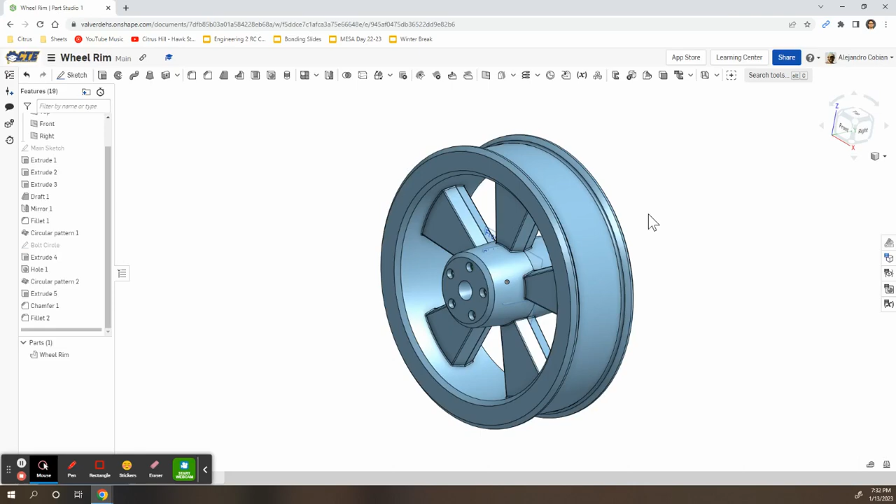Hey, welcome back. So for this video, we're going to work on this rim right here. Notice this is what it looks like three-dimensionally. And this is what the exercise looks like. It's called exercise wheel rim. Here are the instructions. So let's go ahead and get started.

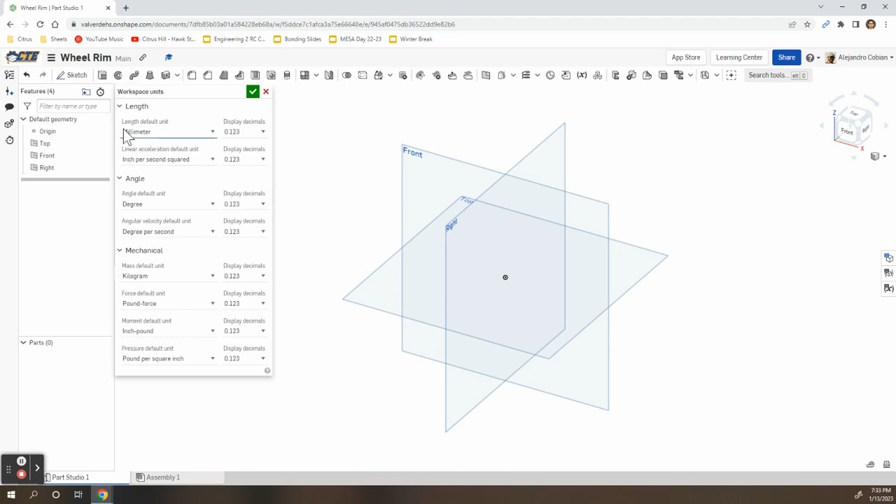So for step one, we want to change our units to millimeters and we want to create a sketch on the front plane. So go ahead and click on workspace units. Make sure we're in millimeters. Select sketch and we're working on our front plane.

For step two, we're creating 1, 2, 3, 4 circles and 2 lines with 1 construction line. So let's start off with our circles. We're centering them right at the origin, and we're just gradually making larger circles. So for our line, let's go ahead and hit L and Q. Click on our origin, and we are connecting this line all the way to the outermost ring.

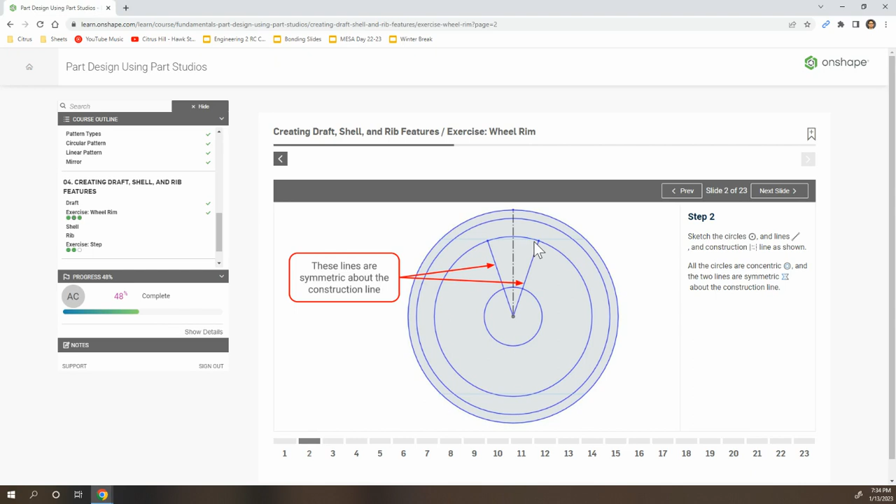And notice the relationships. All of these lines are coincidental to the origin, and then our line is coincidental to the outer ring and the origin. And it's also vertical. And we're going to create 2 lines that are connecting to the origin and to our second ring. So here we go. Let's create another one.

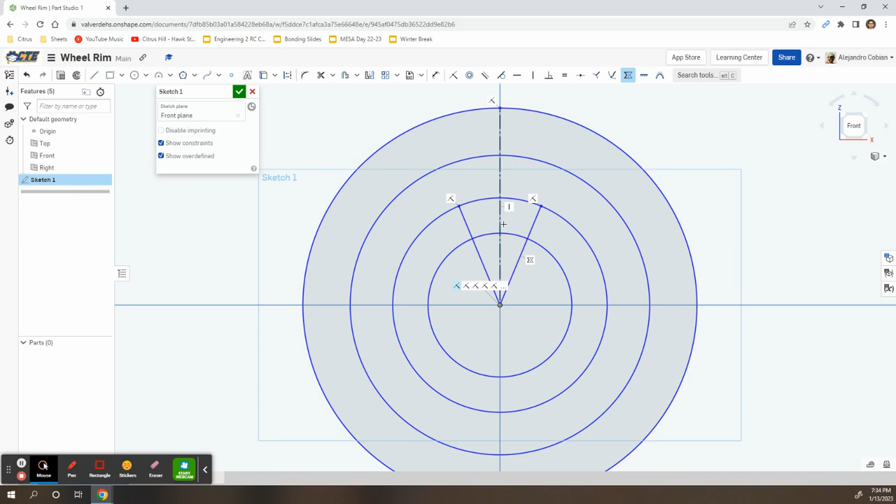And the distance doesn't matter because we're going to add a symmetric relationship. So let's go ahead and click on these 2 lines. And let's make them symmetrical about this construction line. And notice how it automatically moves. So we're good to go.

For step 3, we're adding 5 dimensions. Notice the diameters for our rings and then an angle for our 2 lines. Let's go ahead and select D or select dimension. So let's click on our 2 lines. We'll start here. Zoom in. We want an angle of 30 degrees.

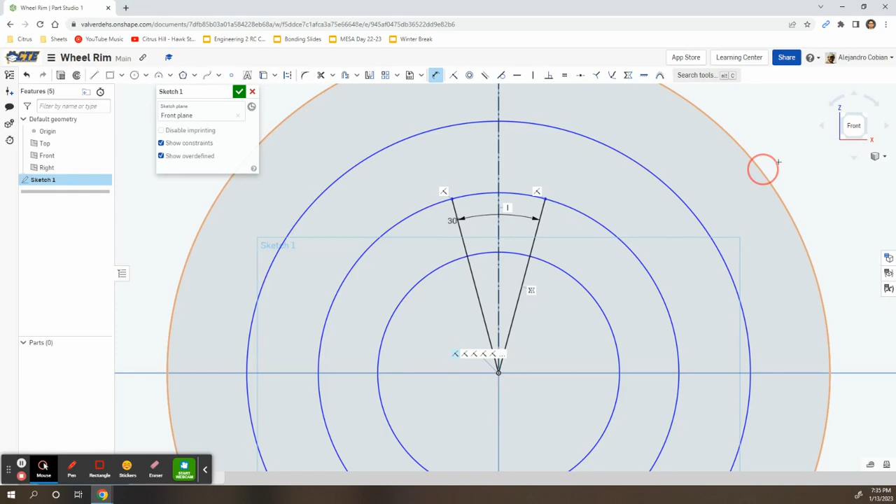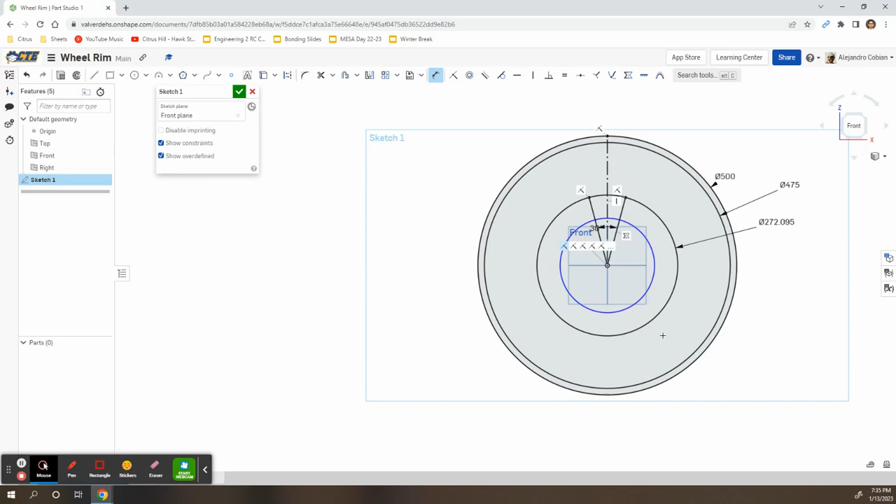Let's start off with our outer ring, which will be our largest ring. And this will have a value of 500. Our second outer ring will have a value of 475. Our third outer ring will have a value of 400. And our inner ring will have a value of 175, 150.

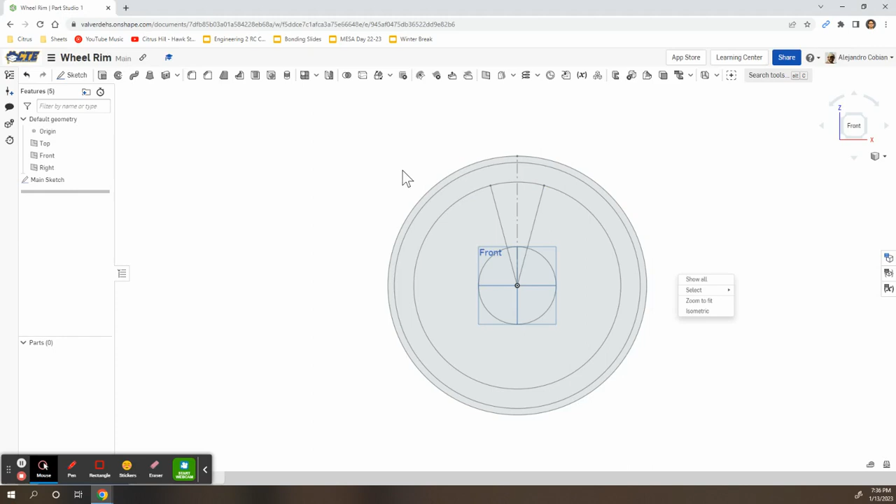For step 4, we're changing the name of our sketch to main sketch. So click here, write out main sketch. For step 5, we're extruding the 2 outer rings. So go ahead and click on extrude. Let's select this ring and then this portion here.

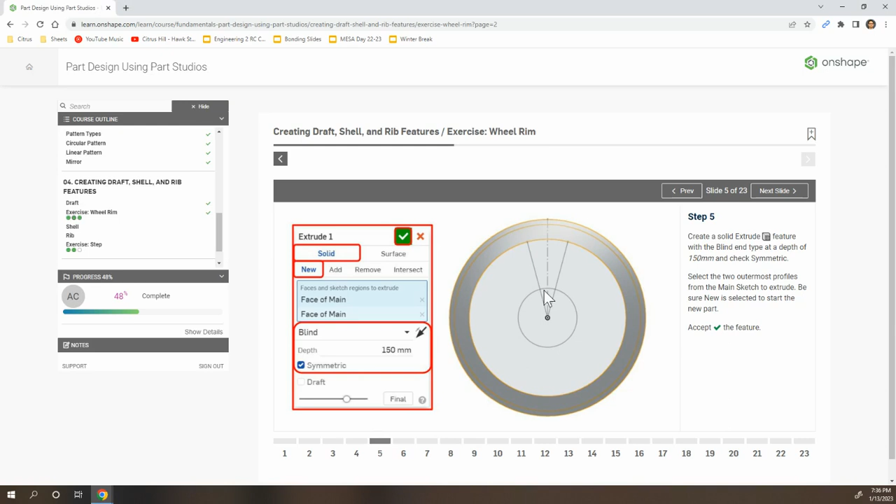We're going to select solid new. We want blind and a value of 150. Let's angle this. Notice we want to click symmetric as well. And we hit the check mark. For step 6, we're renaming part 1 to read wheel rim.

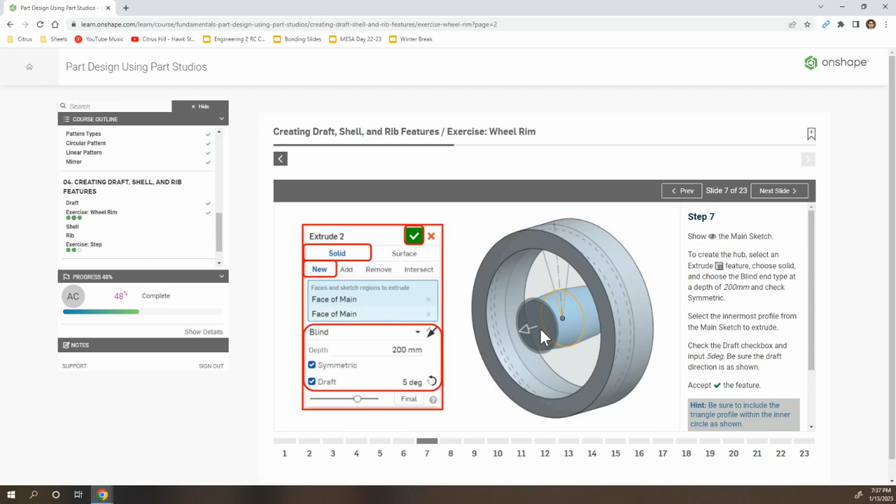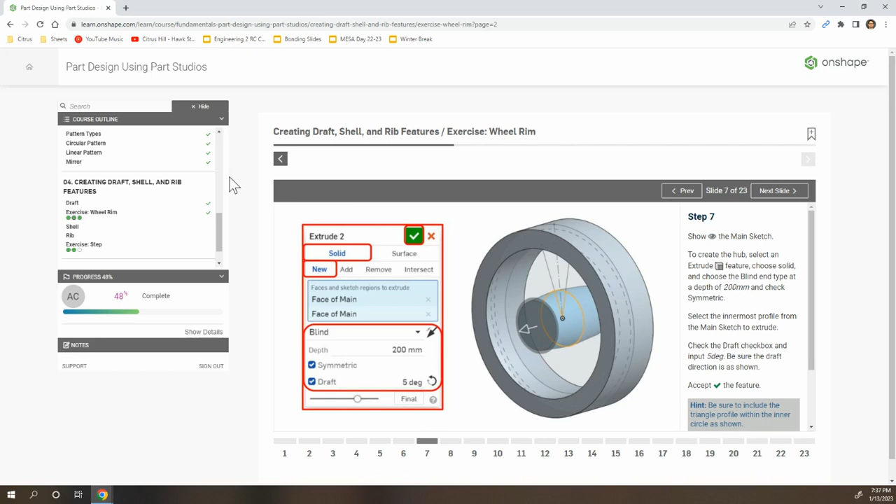Now we're going to extrude our inner portion of our tire. So let's go ahead and look at the main sketch. We're going to extrude again. Make sure you select this little triangle and this portion here. We want solid new, blind, go on a depth of 200 millimeters. We also want the symmetric.

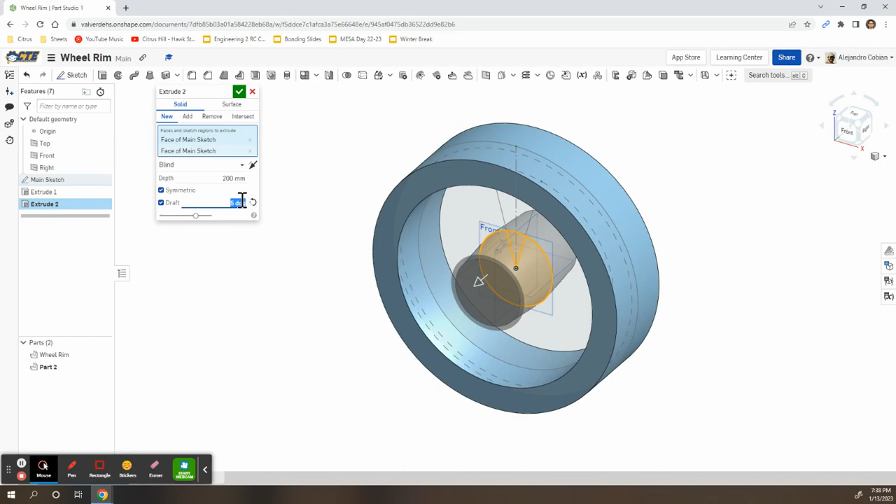And then we're going to draft this. So notice we're having a smaller diameter in the inside and we gradually go outwards with a larger diameter. Let's go ahead and flip that, so we can reduce the diameter as we go outwards. And we want this to have a value of 5 degrees. And hit the check mark.

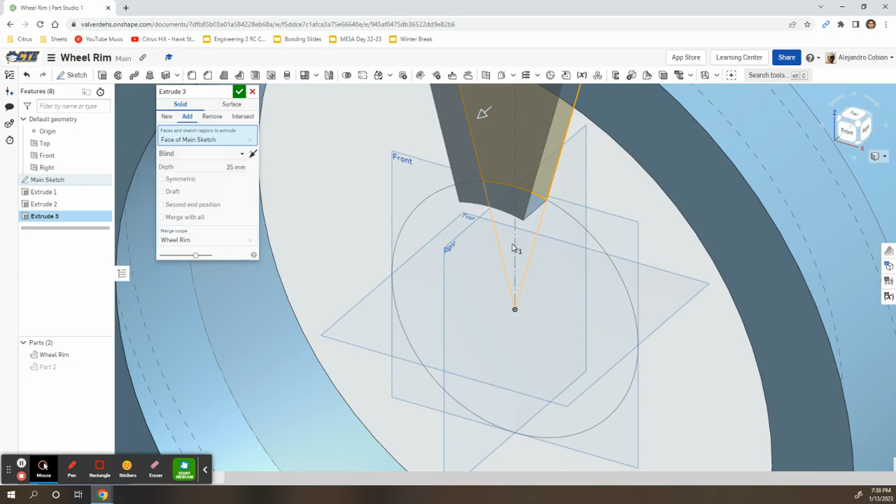For step 8, we're going to add another extrude. So click on extrude. Only this time we're selecting this portion. And then we want this ring right here. So let's go ahead and hide part 2, so we can select this little triangle here. And now we can reselect part 2.

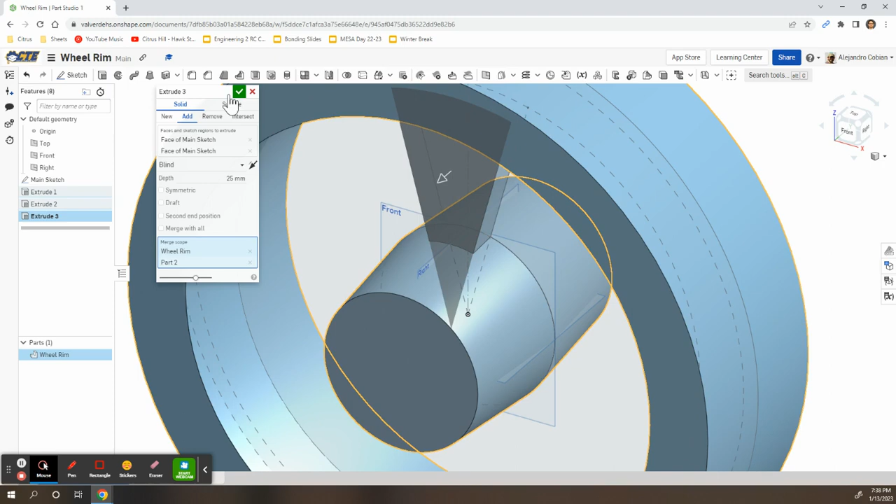So this is going to read solid, add, blind, 25 millimeters. And then our merge scope will be with the wheel rim and with part 2. So notice we have wheel rim and part 2. Let's go ahead and hit the check mark.

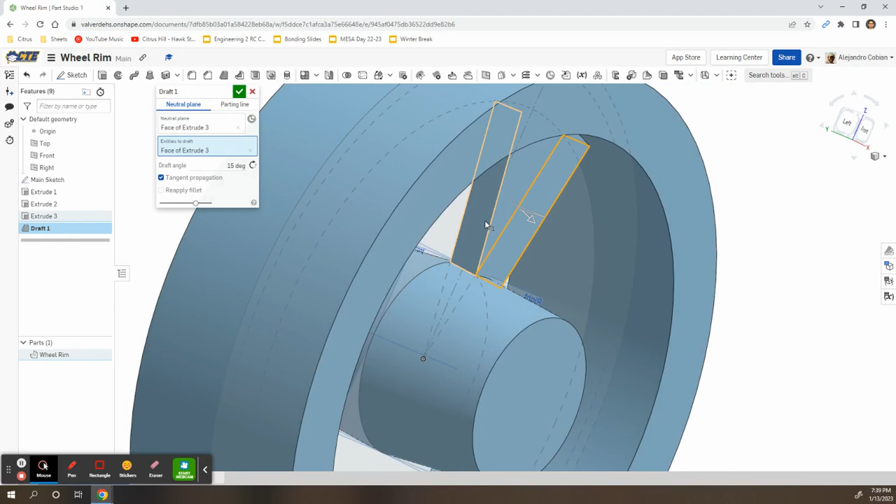For step 9, we're going to draft the outer faces of this portion here. So let's zoom in. Let's click draft. Our neutral plane will be this face. Entities to draft, we're drafting this section and then this section here. Angle of 15 degrees, tangent propagation.

So we're going to make sure that the front face of this is smaller than the back face. So let's hit the check mark. And the back side looks bigger, so we're good to go. So notice we click on this face. It is smaller than the back face, so we're good.

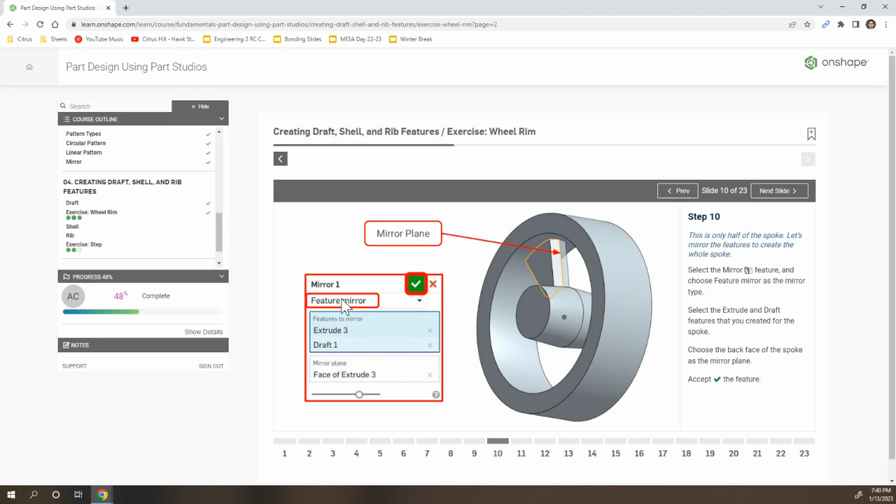For step 10, we're finishing up the back side of this portion here. So let's go ahead and click on mirror. We want to select feature mirror. We're going to select extrude number 3 and draft number 1. And the mirror plane, we're going to the back side of our wheel and we're selecting the back face here. And hit the check mark.

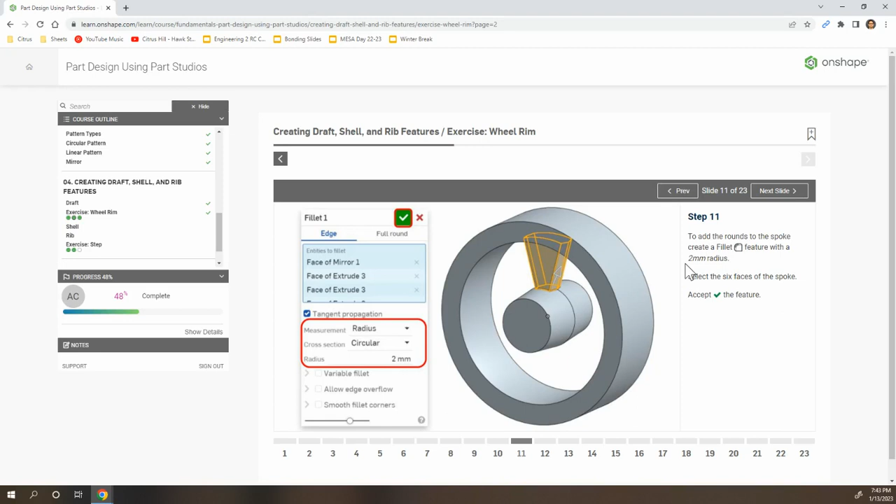For step 11, we're using the fillet feature to round out the edges of our spoke. So go ahead and select fillet. And now we're going to select all 6 faces of our spoke. So they're the first 3. Number 4, number 5, and then number 6, which is this face here.

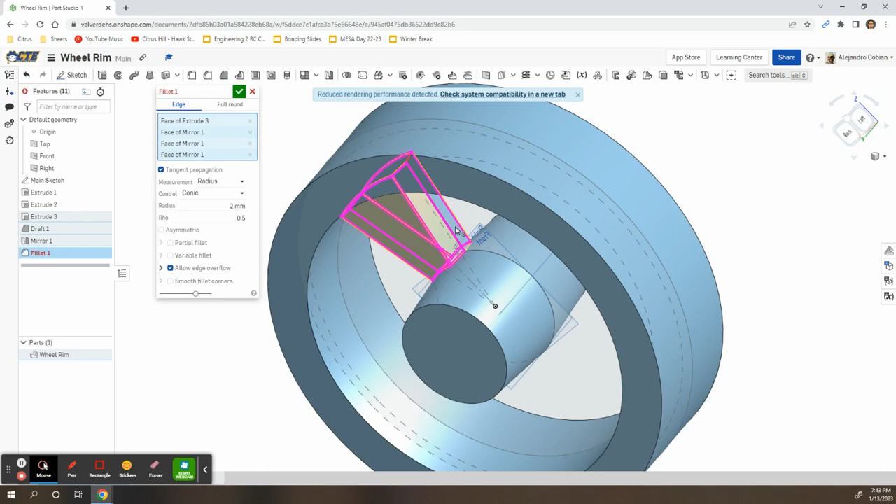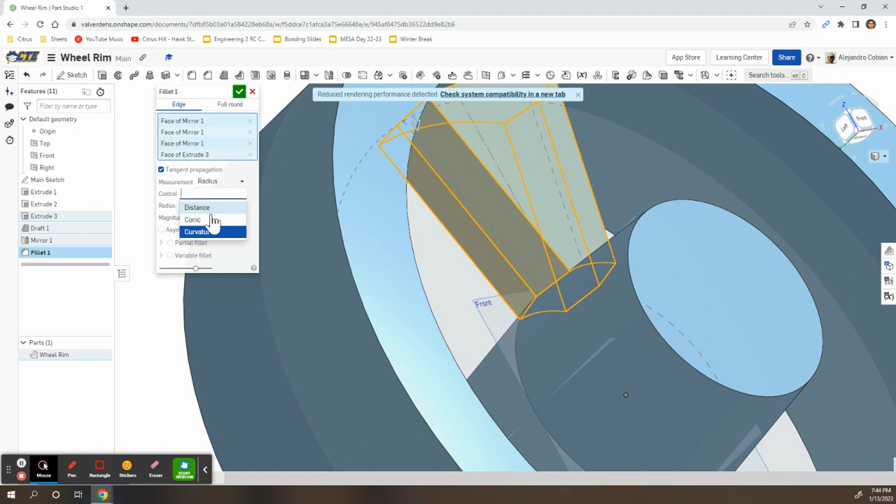So right here we are selecting radius. We want to deselect allow edge overflow. And we want conic. Here we don't see circular, so let's just go ahead and select conic. Curvature has sharp edges, so let's go with conic and accept. So this is what we had before, and this is after.

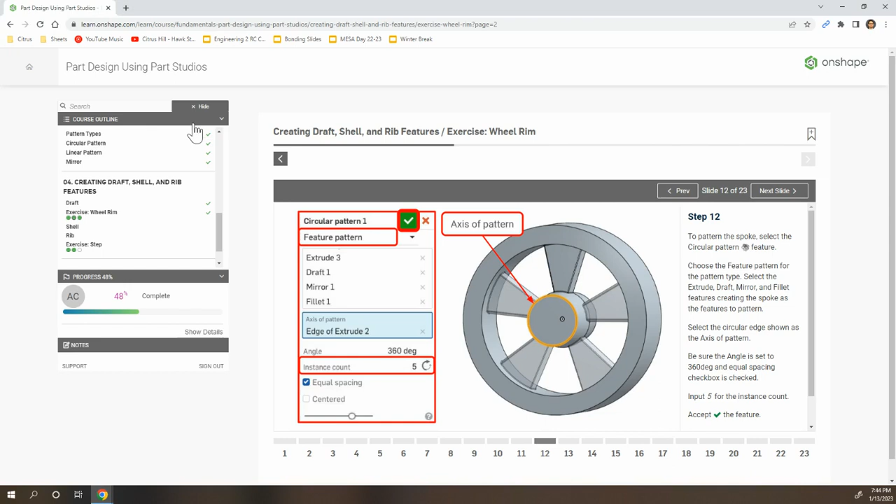For step 12, we're creating a pattern for the spoke. So let's go ahead and click circular pattern. So select here, circular pattern. We're going to select feature pattern. Features to pattern, we're going to select extrude number 3, our draft, our mirror, and then our fillet. Axis of pattern will be this portion here, these edges.

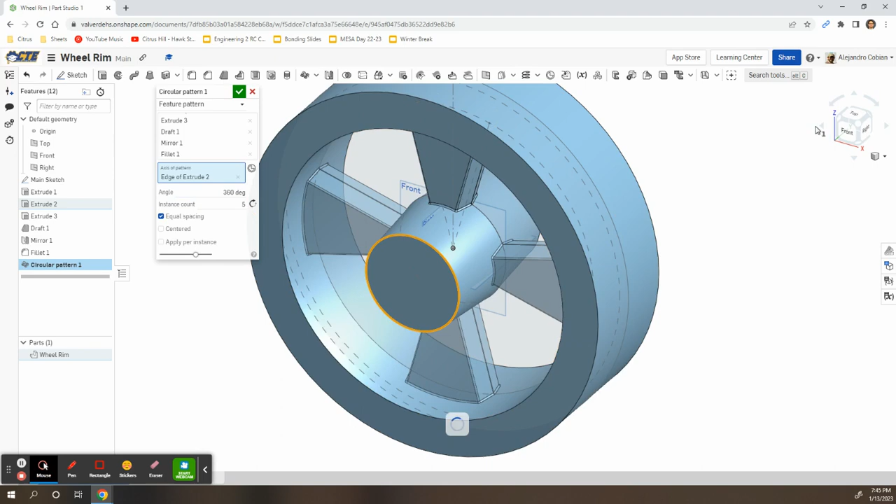Now let's go ahead and add, our value here should be 360. Our instance count should be 5. And go ahead and hit the check mark. Step 13, we're creating a new sketch on this plane here. So let's go ahead and select this face and select sketch. So we're right on the hub.

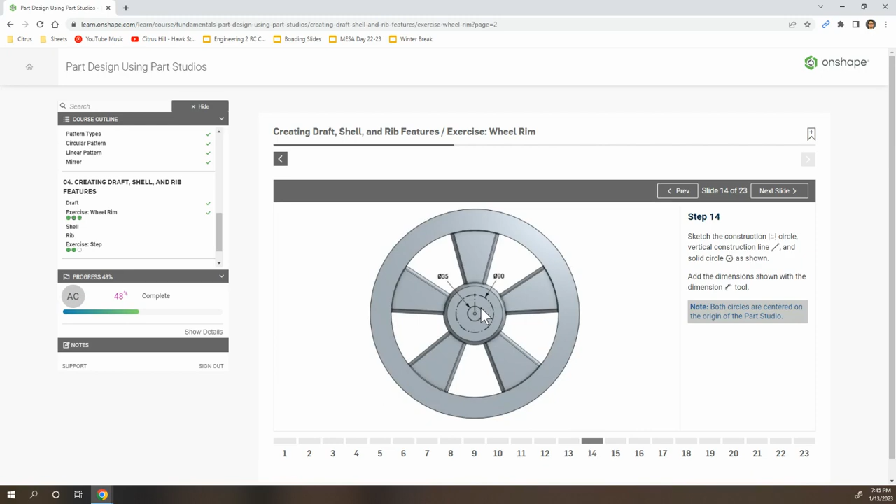So let's go ahead and create 2 circles. Notice one is construction and one is a regular circle. So here's our first circle right on the hub. Let's make sure we connect it to the origin, go outward. Now we're going to add another circle that is a construction circle. And now we want a line that is a construction line going from the center or the origin all the way up to our outer ring.

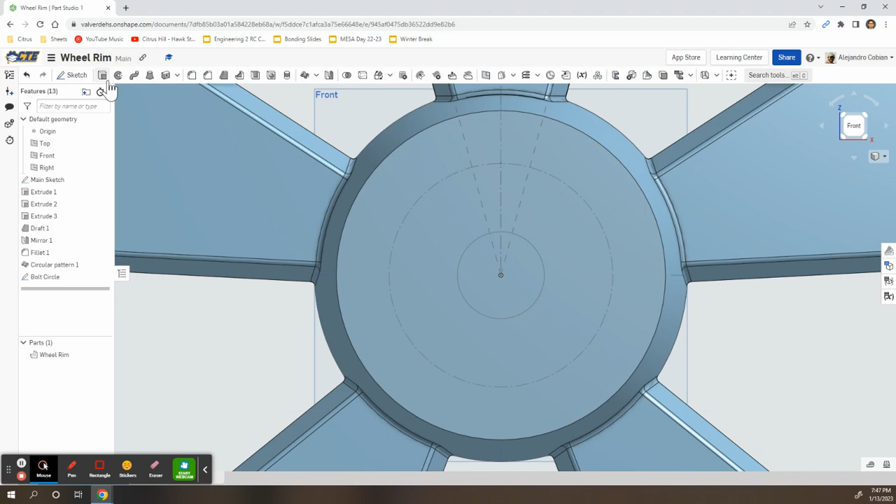And we want to add a value of 35 for our first circle. Then our outer ring will have a value of 90. We name this to read bolt circle. Step 16, we're removing the center ring here. So go ahead and hit the check mark. Let's click extrude. This one might be a little annoying. So I'd like bolt circle.

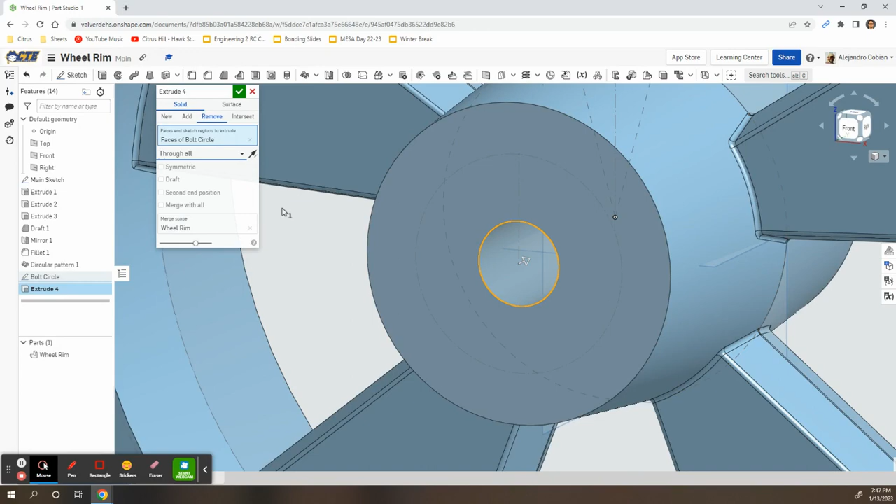We're going to select solid, remove. Faces is this portion here. Let's go ahead and select bolt circle and click right there. So you might have to click away to select this inner portion. You want to select through all. So through all. And hit the check mark. So once again, make sure this is extruded and removed.

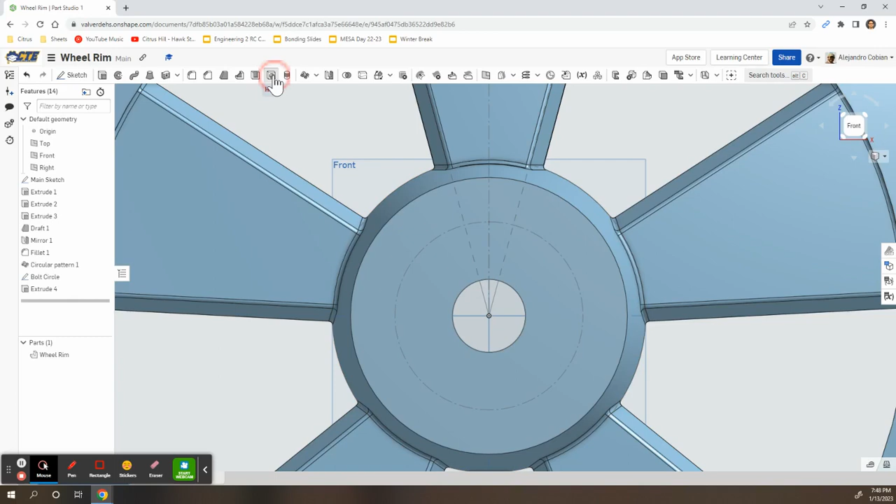For step 17, we're adding a hole. Let's go ahead and see the front view. Let's make sure we see this sketch with the bolt circle. Let's go ahead and click here for hole. We're selecting this portion right there.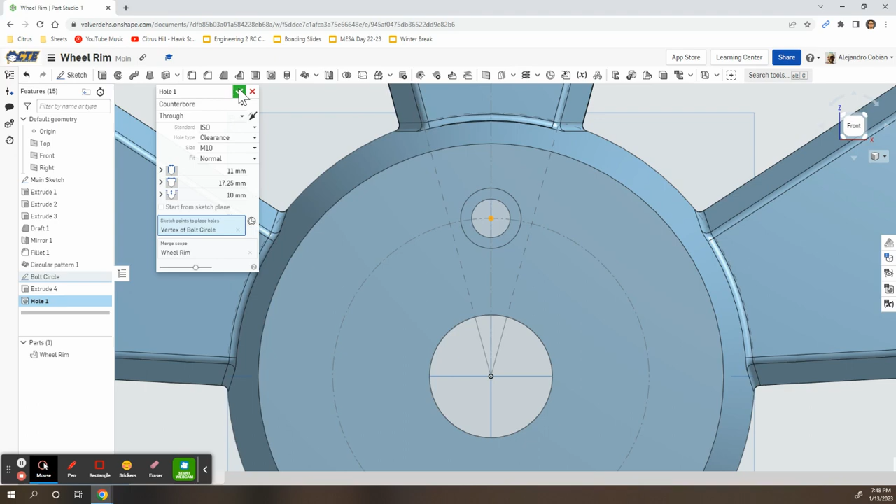So we want counter bore, through, ISO, clearance M10, fit normal, 11, 17.25, 10 millimeters. So we have all of these dimensions. Make sure you read this. And mine is good to go. So I hit the check mark.

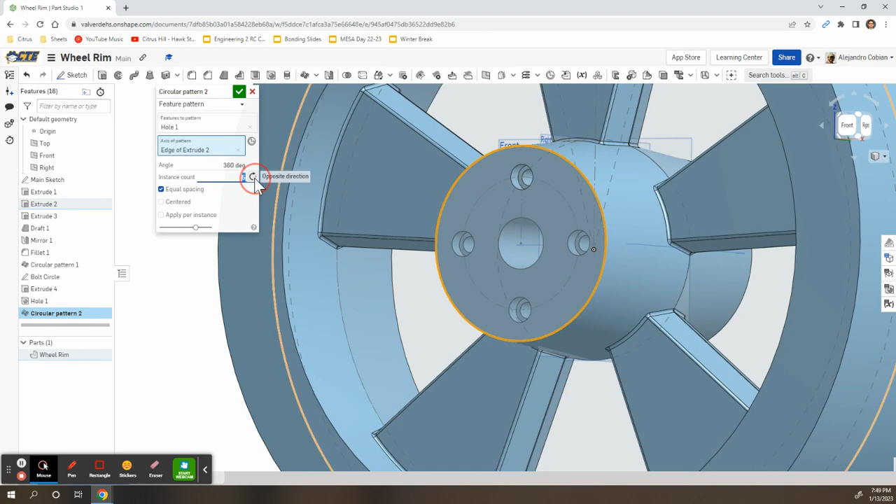So for step 18, we're creating another circular pattern out of the hole that we created. So go ahead and hit select circular pattern. We want feature pattern. Select hole number 1 for features to pattern. Axis of pattern will be this edge here, and we want a value of 5. And notice that these holes are above each location of each spoke. And hit the check mark.

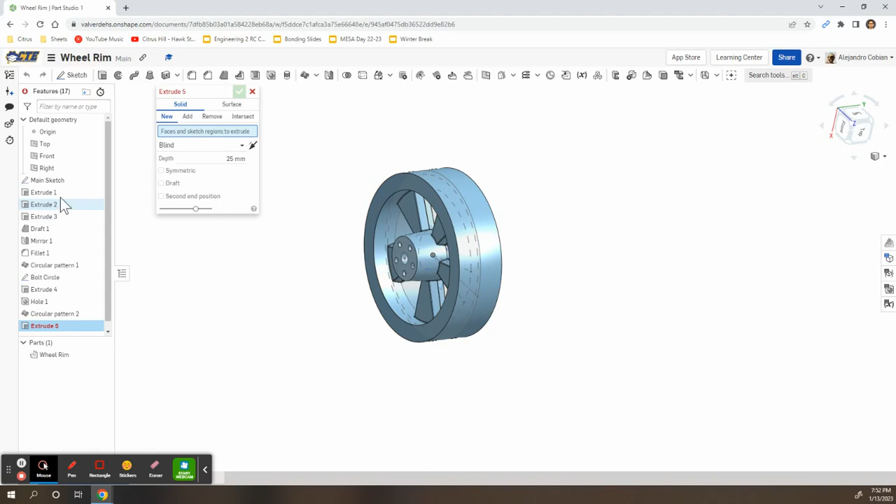So for step 19, we're going to create this hollow region in case we want to add a wheel. So let's go ahead and remove this by extruding. So select extrude. Faces and sketch regions to extrude. Let's go ahead and select this sketch, the main sketch. And now we're going to add up to face. The face that we're selecting is this one here. We're going to offset the distance with a value of 20.

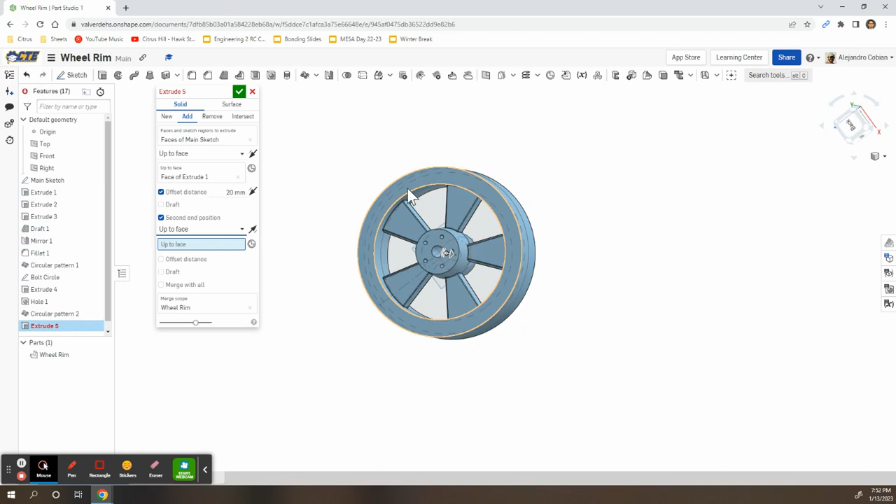We're going to add a second end position. And this will be up to face, and we're selecting this face here. We're going to add an offset distance with a value of 20. Make sure we select remove. So now we've selected remove. Now we have this hollow region and we're good to go, so hit the check mark.

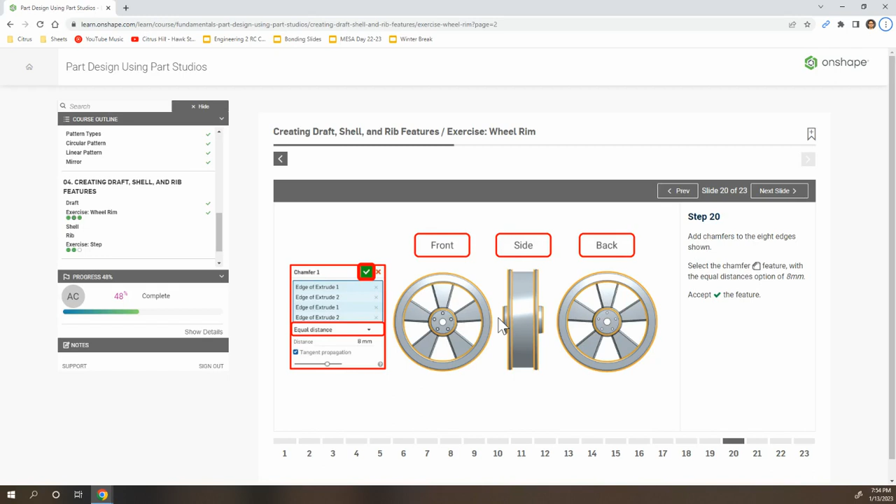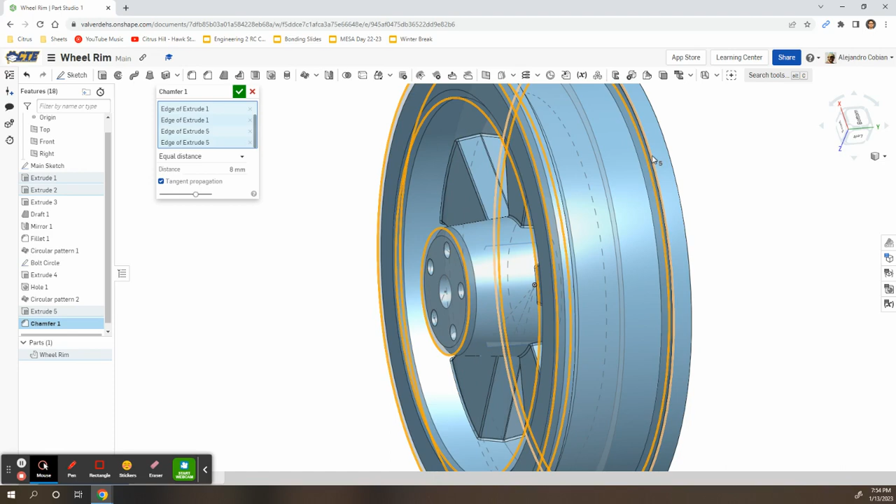For step 20, we're going to use the chamfer feature to go ahead and smoothen out these 8 edges selected here. So 1, 2, 3, 4, 5, 6, and then this intersection here. So let's go ahead and select chamfer. Click here. Edge number 2, number 3, number 4. Let's do the same here. This corner, or that edge, this edge. Our other edge here. This one, and then this one here. Notice we have a value of 8 millimeters. Tangent propagation, go ahead and accept.

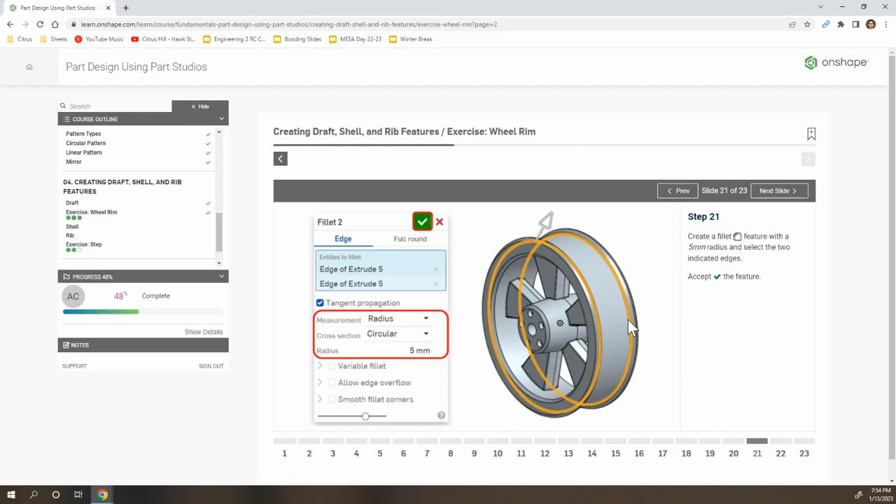For step 21, we're adding a fillet feature to these inner edges in the inside. So go ahead and click on fillet. Select this portion here, this section here. And go ahead and select radius, circular, or conic with a value of 2 millimeters. Whoops, 5 millimeters. At this point, let's go ahead and change the material of this wheel rim. For step 22, we're changing the material to aluminum. So assign material. Let's type out 1060 here and select the check mark.

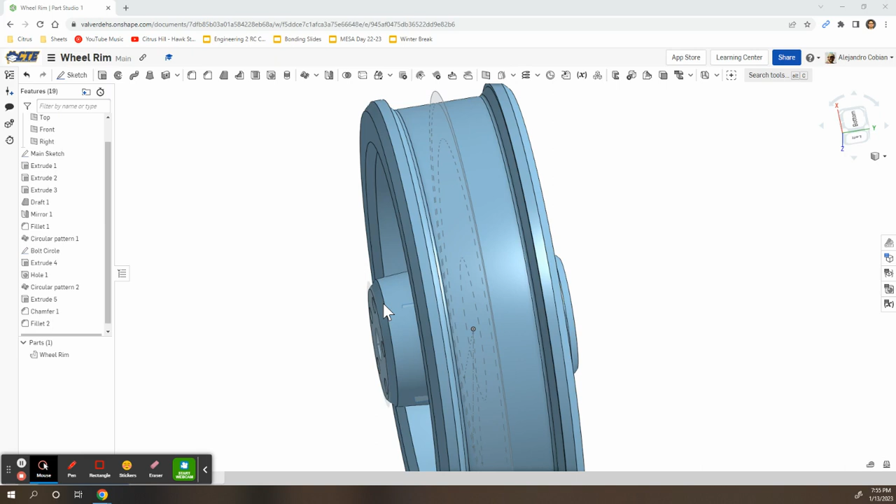Now for our final step, let's go ahead and use the mass properties tool to check our work. So select mass properties, click on wheel rim, and we should have an answer that's close to what we want. Thanks for watching, and go ahead and try out some other sketches.